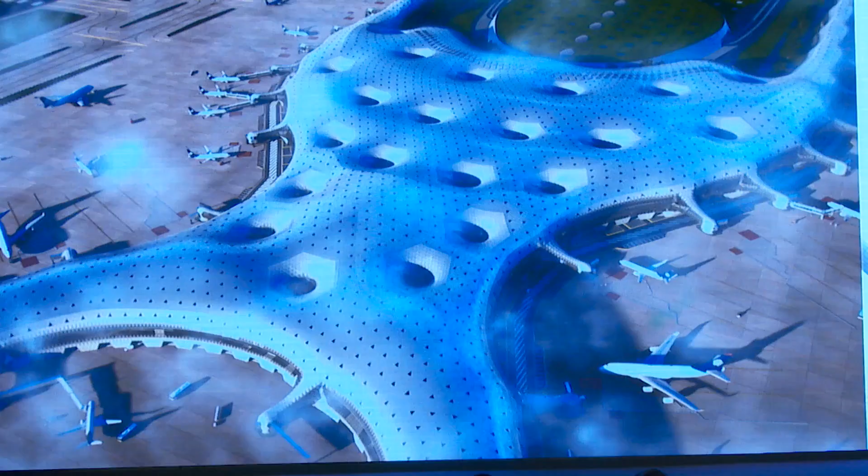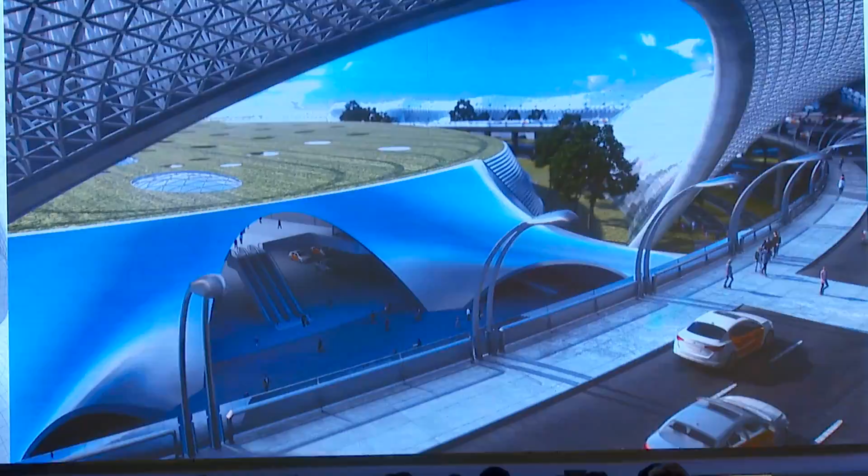So that's another example, the new Mexico City airport designed by Foster. I was actually in Mexico just last week. Just a week ago, I was on a construction site. It's going to be one of the most amazing projects. It won the Excellence Awards for infrastructure project.

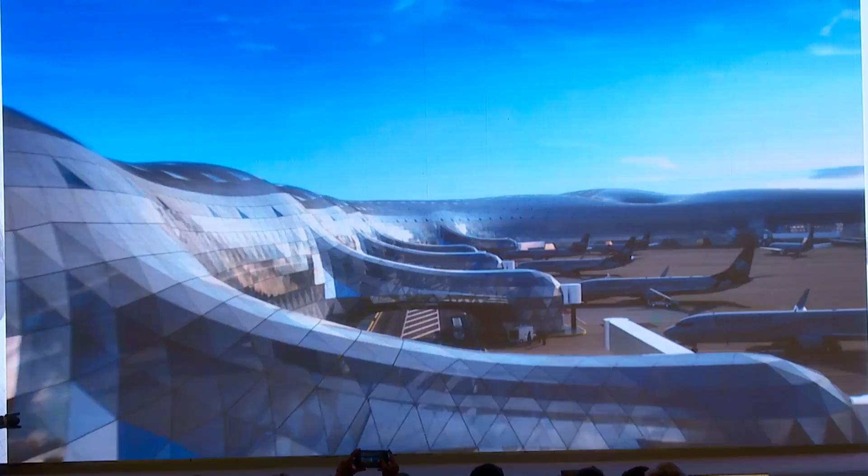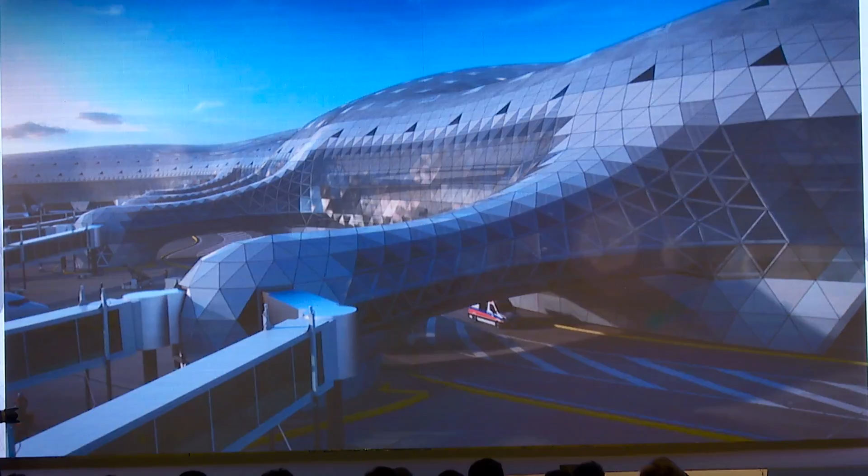So it's an amazing project, and they've been using all of the technologies around generative design, and are using also cloud-based technologies for the construction side.

So we've seen a lot of projects in building, but also in infrastructure, like this project here, it's the second largest or third largest infrastructure project in the world. It's the Grand Paris project. I'm actually from France originally, and it's made of 220 kilometers of new railway, and 90% of it will be underground.

They're also building 68 new train stations underground, and they've used the full portfolio of technology to integrate both horizontal and vertical infrastructure. So BIM is working all around the world, and we see many, many customers. In many regions, it's the standard way of delivering projects.

But what's next? If you look at technology or eras of disruption, every 10 to 15 years there's a major wave, a major earthquake in terms of disruptive technologies. 35 years ago, it was AutoCAD, moving from hand drafting to CAD. And many of you are still living in that world. That's the era of documentation.

15 years ago, we introduced BIM and Revit, and it was the era of optimization. We were building a 3D model and using that model for simulation, for coordination, etc. But today, we believe with the cloud, we are entering a new era of disruption. Very few are in this new era, and that's what I would like to discuss today.

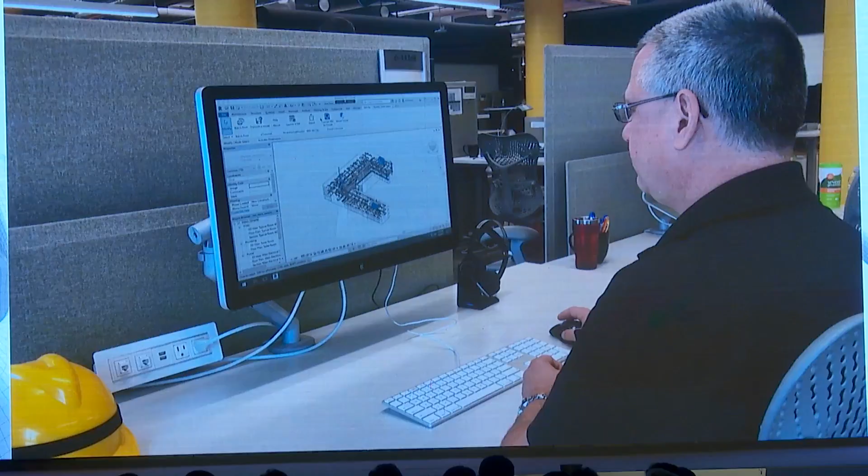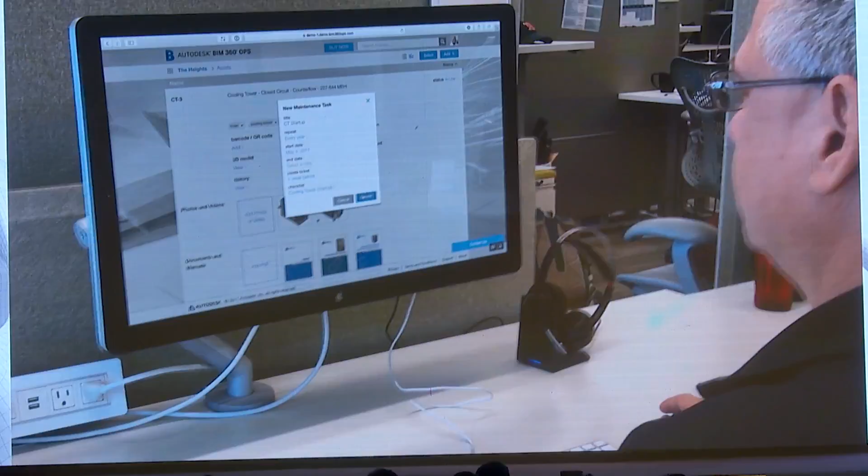With the press of a button, you'll be able to push all of this data to different operations and maintenance tools. We work with different partners like IBM and others, but we also have an app right now called BIM 360 Ops. It's free, you can download it and see how you can manage your facilities with this tool - everything based on this same, unique platform.

The next piece I want to discuss is industrialized construction. We heard a fantastic customer this morning talk about the work they're doing with precast structures for schools and other types of projects. There's definitely a big trend going on right now in the world, and with the productivity issue, we see a lot of companies researching, like the one we saw this morning, how we can use manufacturing processes in construction.

The point here is many companies - and this morning I was blown away by the work they do - are using these processes. But what everybody really wants is to use assembly lines like you see in manufacturing. We've done some early research, and today 90% of the waste on the construction site can be eliminated if you work in a factory instead. The construction site is only 30% as productive as a factory. And in terms of safety, there are 2.5 times more accidents on the construction site than in a factory. So there are a lot of drivers pushing all of us to move things from the site to factories.

And talking about the factory, this morning we saw an example that will look a little bit like that, and it's fascinating how similar the vision is to what we're working on. It's really this idea of a plant that will use some of the machines like in manufacturing and take some of the components directly from Revit that are segmented and then will be fabricated. In addition to what we saw this morning, this machine will also add doors, windows, electrical, and sensors for the future, light switches - all of these things will be brought into this single machine. Because our customers design machines, we work with them to see how they can extend the machines they have for other industries and bring them to the AEC world.

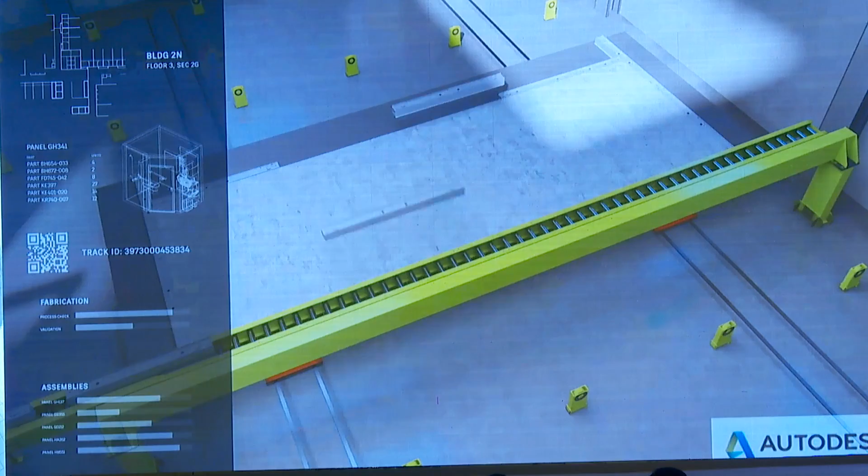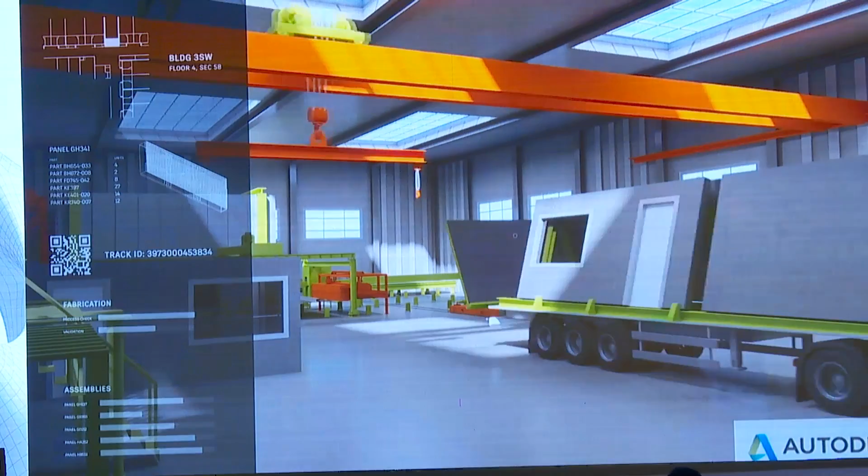And on the left, you see how things will be tracked, because all of these components need to be tracked with sensors - I'll talk about IoT and the role of IoT in construction - and all of these objects will be tracked moving forward.

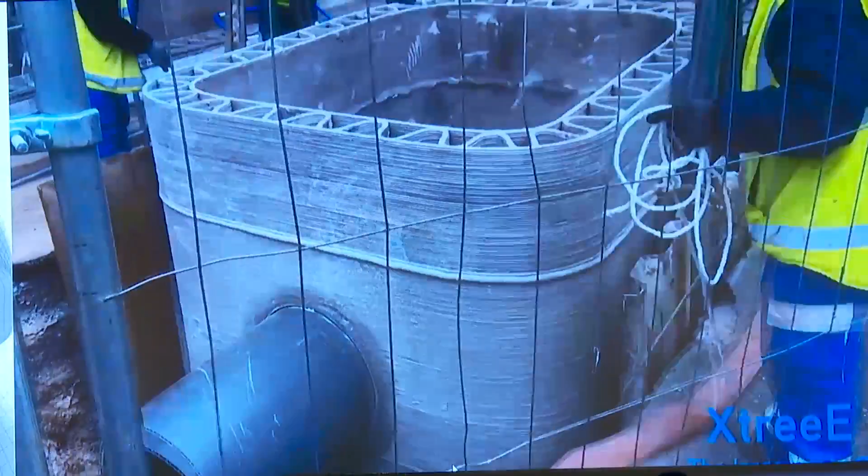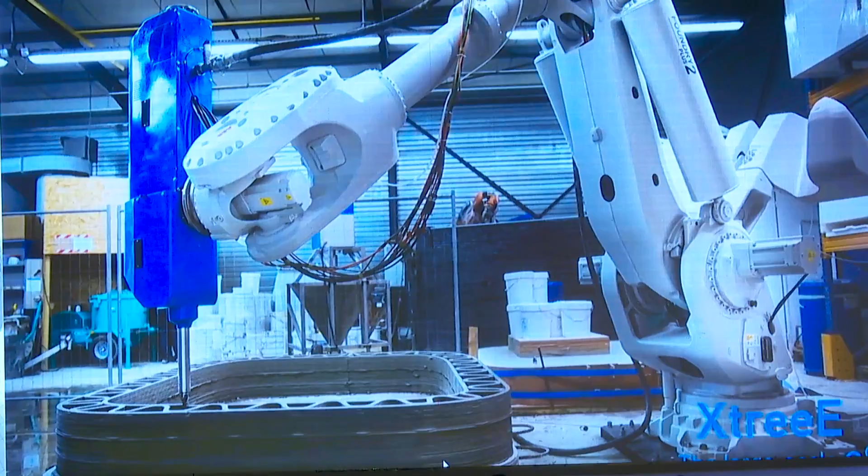The other thing that we are doing - and we heard about 3D printing this morning - is we are partnering with a company called XtreeE. The previous example of a factory was really mass production, but here, this example is mass customization. There's a point where the cost of building a formwork, or programming robots, or creating some of the assembly line we saw, will be too high, and 3D printing of concrete will be the solution at some point for mass customization of some of the concrete elements.

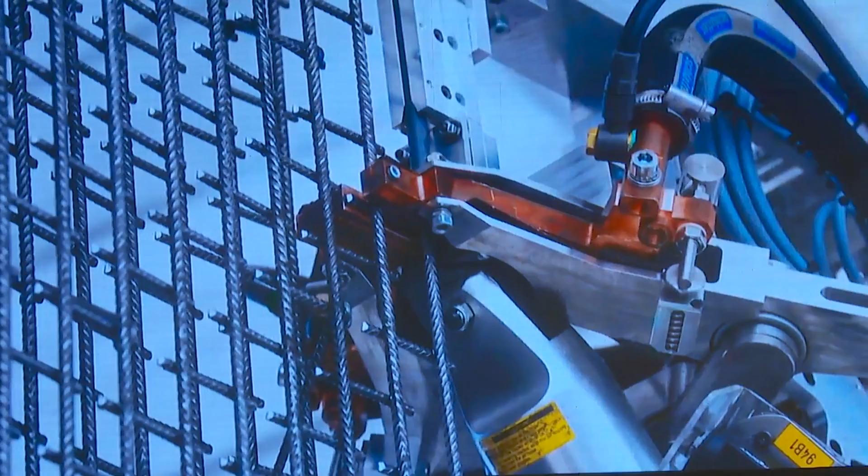But that's not all, because we also heard about robots. Remember what I said: we need robots to be geolocated, to be connected to the digital world. One of the things we are working on is working with different companies that make robots, so they can take a physical model, if you will, of rebar, and in that case it's about welding some of this rebar. So more and more you will see robots that do this type of work in factories.

And then moving into the site installation. So now that all of these components are built in a factory, it's going to be like Legos, and they will be delivered on site and assembled. It's very close to the vision that we heard this morning. So some of these components, precast panels, will be delivered. Some of the modular rooms will be placed inside the building.

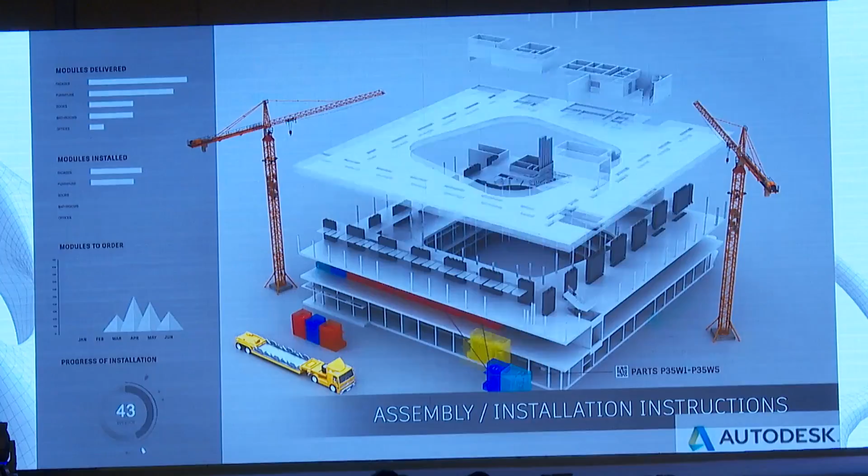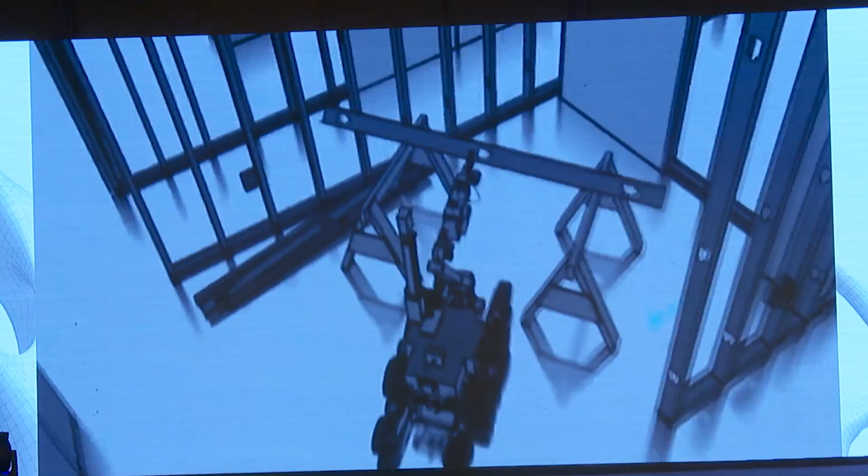But it's not all. Robots can work in a factory, but they can also work on the construction site. I'm going to show you a couple of examples. This first one is robots that will be geolocated on the site. They will get the information from the model in the cloud and will start doing the layout on the construction site.

The next one, Tatiana actually showed this example, and it's basically the exact same idea. The robot is on the construction site, it's geolocated, it's connected to the model in the cloud, and then the person in the office uses VR, or it could be other systems, and that person can, through the cloud, control the robot. These things are done today if you look at remote surgery. Today there are actually surgeons in India that operate on people in Europe or the United States. So it's this idea of remote construction, using robotics, VR, and drive remote construction.

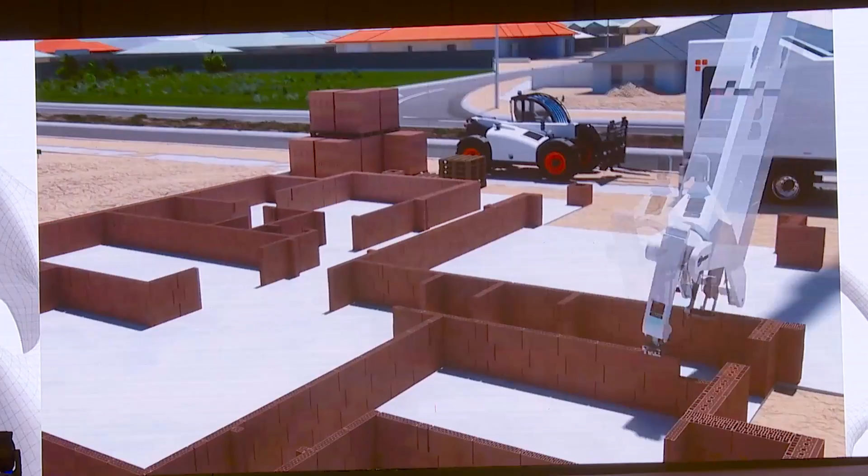The next one is from our friends in Australia, an example of a company, and there are multiple companies like that. Same principle: the robot or truck is geolocated, connected to the model in the cloud, gets the information of what needs to be built, and then you see what they do.

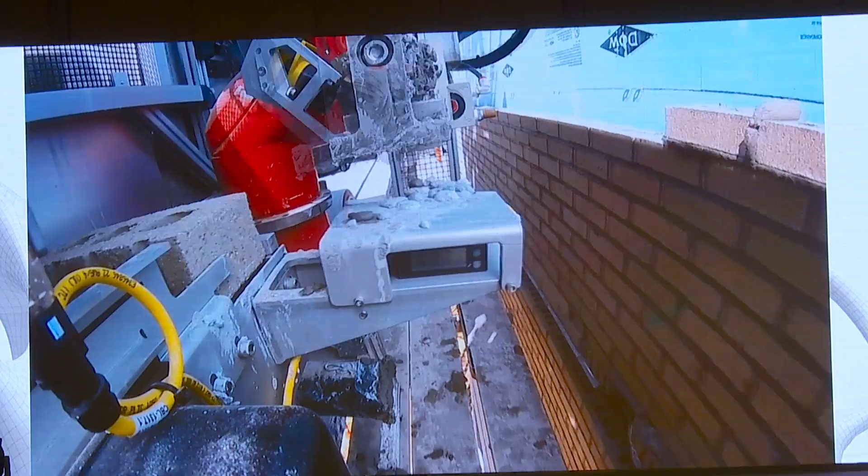We actually presented Sam, his name is Sam, this robot, at Autodesk University a year ago. So I like to joke about it: don't tell President Trump that this machine exists, because he wants to build a big wall between Mexico and the US, and nobody wants to build it. Maybe if he buys a couple of robots, he'll be able to do it.

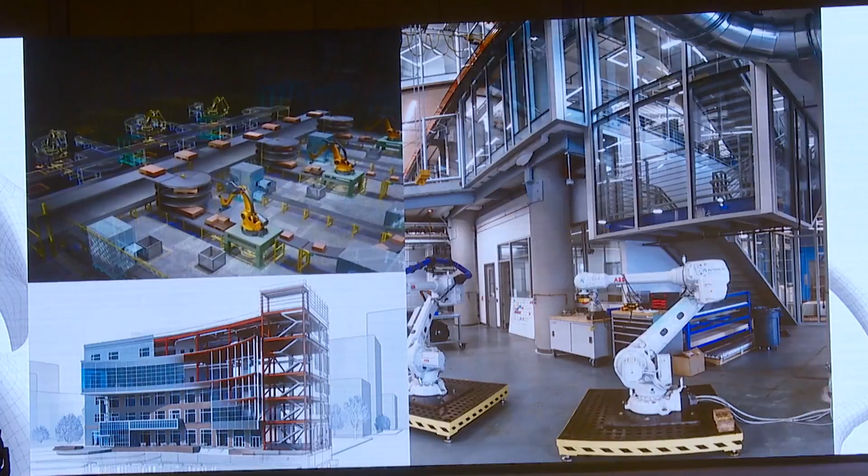Right, I'm joking. So we actually developed a facility in Boston - I'm based in Boston, who can tell - to do research around robotics. We incubate startups, we have researchers from different academia, and our own developers. I invite every one of you to come and see what we do. We are taking our manufacturing expertise and our construction expertise with BIM to bring this together to deliver on this industrialized construction. I think it's going to be key to deliver on the demand that we'll have to build 1,000 buildings every single day.

So let's talk a little bit about IoT, the Internet of Things. If you look at the platform idea, IoT is a different type of data, and it's going to give us a lot of insight. If you look at what different industries do - manufacturing, for instance - they can put sensors on the frame of a race car to understand in real time stresses, deflections, or any kind of things. That's what we want to do for construction.

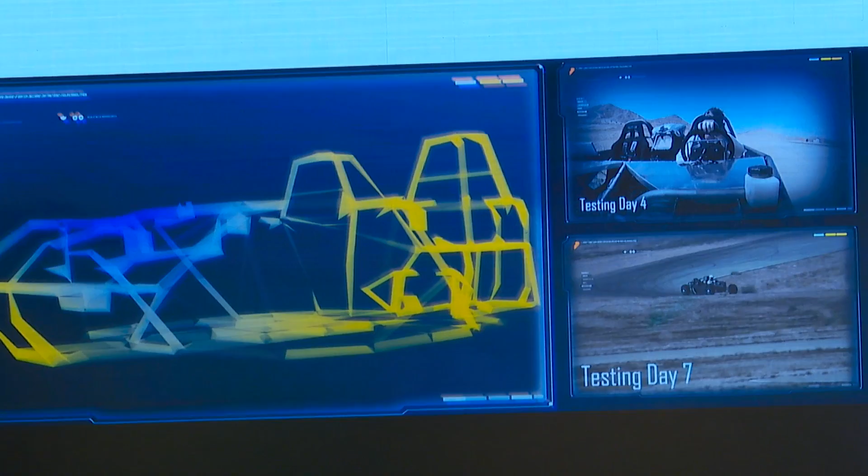Today, many startups around the world develop connected objects, and I'm going to show you some examples. Why do they do that? It's because of this lack of productivity in construction - we don't really understand what's going on or not going on at the construction site. These companies instrument sensors to capture some of this information, and I'm going to show you three different examples.

First, there is this company called Triax. They develop a device that you put on every worker, and it tracks if somebody falls, for instance. As a result, it can send an alert for response to get an ambulance, based on the height of the fall, et cetera. But this device - so we know where the person is - this device goes two ways.

If there is an alert and somebody needs to be evacuated, or you need to say this area is too dangerous, you can send a message, and the person will get a vibration and will be evacuated. So it's one example of IoT technology in construction.

This next one is a company called PillarTech that we incubated. Basically, they have sensors that they put on a site, and the sensors will detect things like dust or dangerous particulates or humidity, and will be able to predict if, for instance, mold will develop on the construction site. So they capture all kinds of information on the construction site and send alerts, for instance if a pipe burst or something like that.

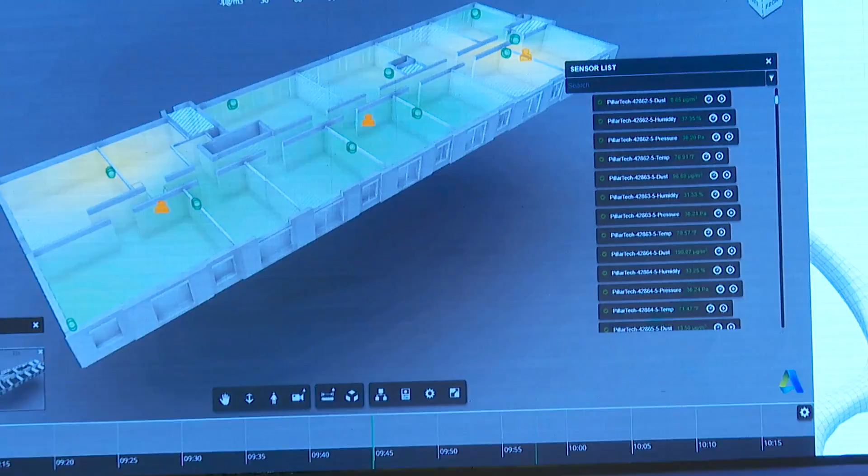The green dots represent the sensors, and at any point in time you can see, for instance, the dust during the construction. The heat maps will show different levels of dust in different regions, and you can go at any point in time and look at the dust in these rooms. Now we plug in the Triax data, so the people - we know where they are - and we trigger some dangerous materials here that will force the people to evacuate.

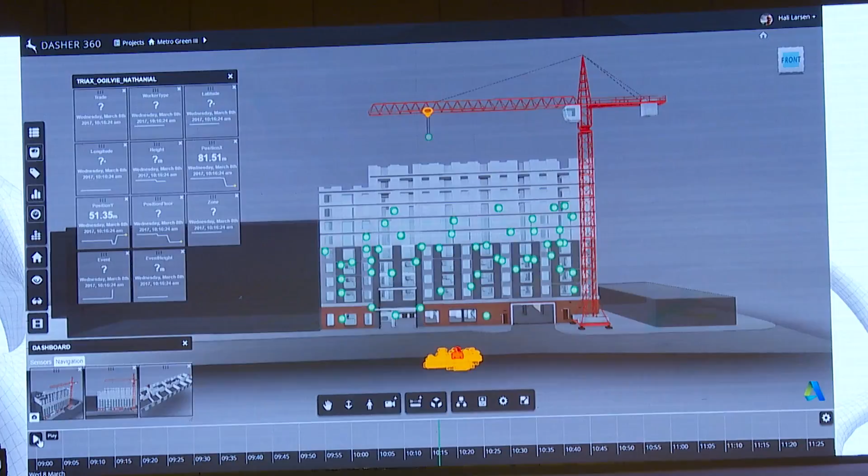So you can start tracking in real time people, machines, conditions on the site, and then, if you use these factories and materials - one of the key reasons why construction is not as productive as we want is because we don't know what's going on. We don't know if somebody walks 15 kilometers on the construction site to look for some materials. We will be able to do that. And here you can see the crane as well, so we can track where the crane is and connect the location of the crane with the people and trigger some alerts.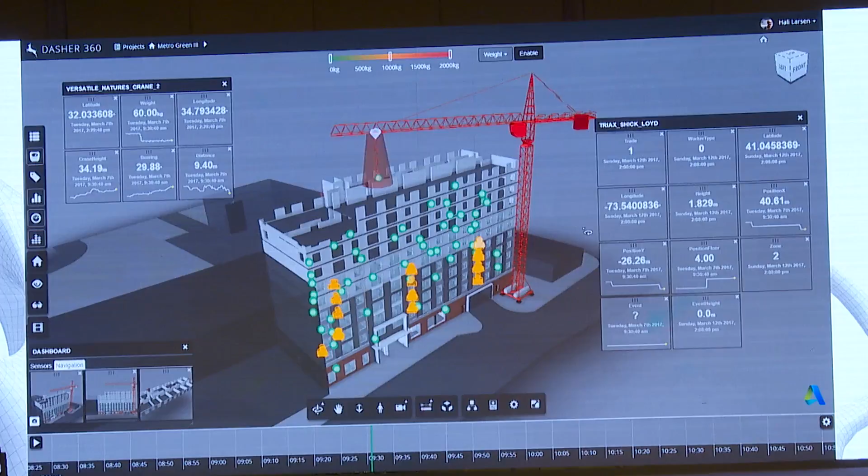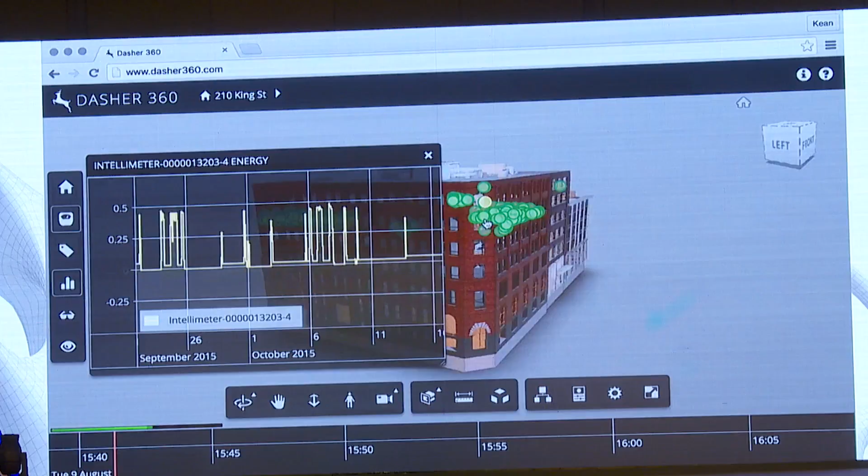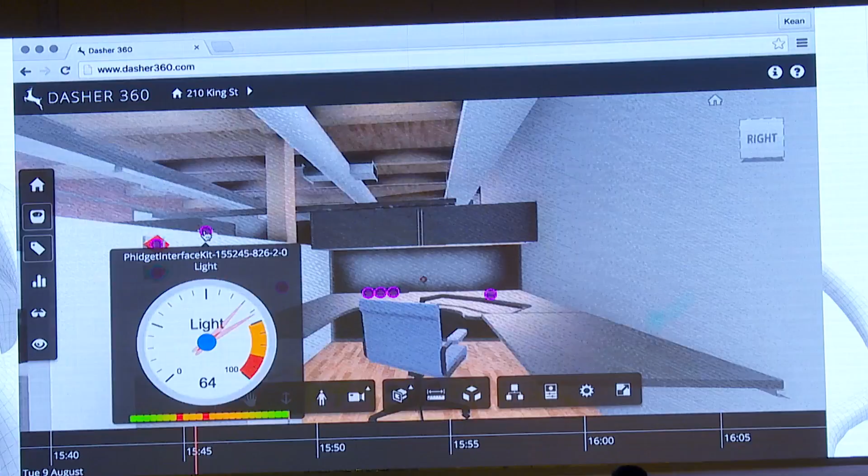So Tatiana showed the same example here around IoT. In this case, it's real-time conditions on a living building. So we can see light, humidity, where people are, what they do. It's really about understanding how people operate the project. We can understand very precisely what the different conditions are, and it's very important to capture all of this.

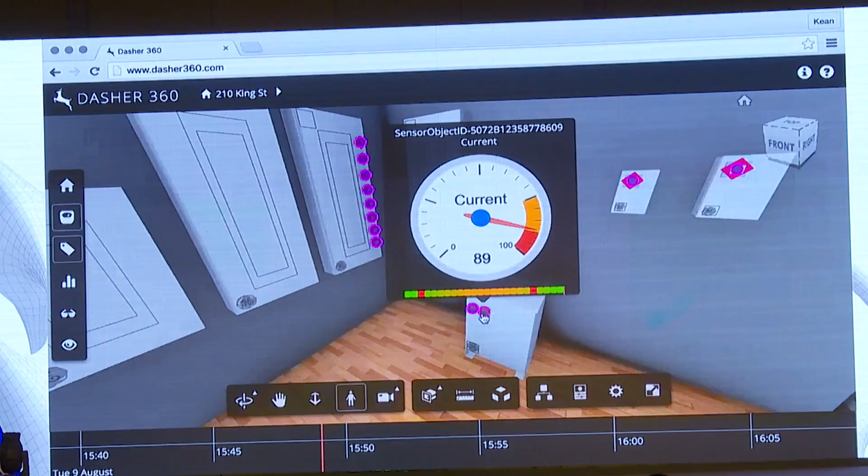Because we spoke about generative design, right? You can do generative design in two different ways. You can do the way we heard this morning, which is great - you start defining some parameters, and I'll show you some examples. Or you ask the computer to use artificial intelligence and machine learning to capture live data and learn for each of the projects to design better buildings.

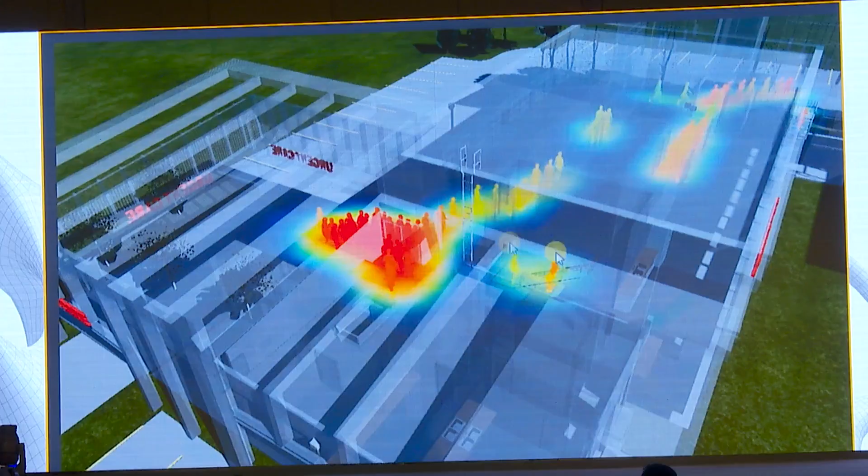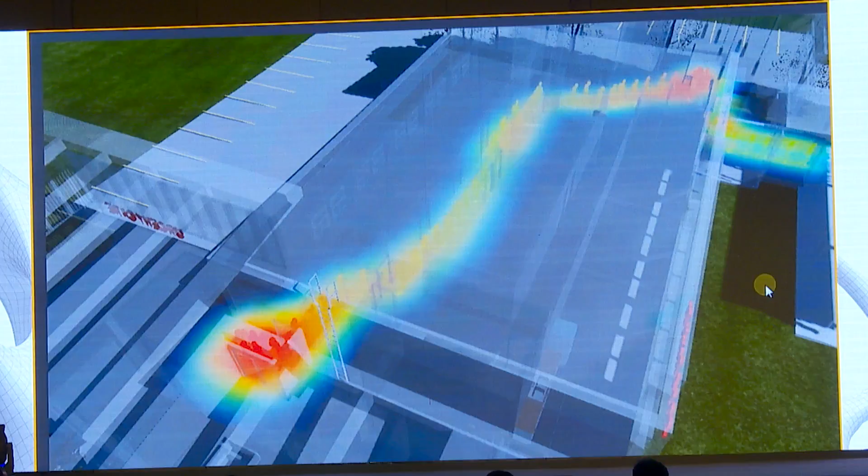This is another example of using IoT. Alan and Shikran from Buro Happold presented some simulations. Basically what they do is simulate what they think people will do. But imagine people have sensors - you will know what they actually do. So you will be able to compare as-designed and as-performed. When you bring these two things together, you will be able to refine even more the simulation models that we use for design.

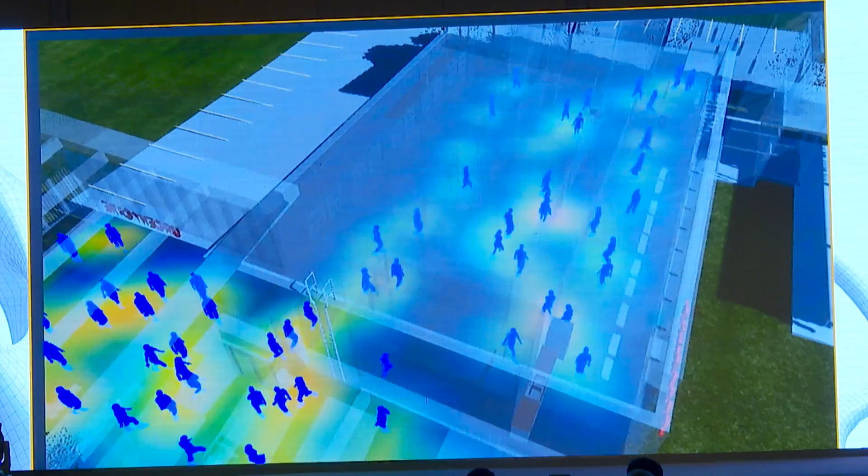So the importance of IoT will be to capture data, and this data needs to be used to improve productivity on the site and during maintenance or operations of the building, to really understand how we can use this information for better design. And that's the next part, key areas of machine learning. We spoke about the common data environment, we spoke about getting better insight through IoT, and the last part of this presentation will be about analytics on the data.

But the same thing can be used in AEC. We've done a number of research projects where the computer can explore tens, thousands, or hundreds of thousands of situations for the best facade. We heard about the Mars project in Toronto, where we asked our employees their preference, and the computer generated many different options. So this idea of generative design can be used on anything.